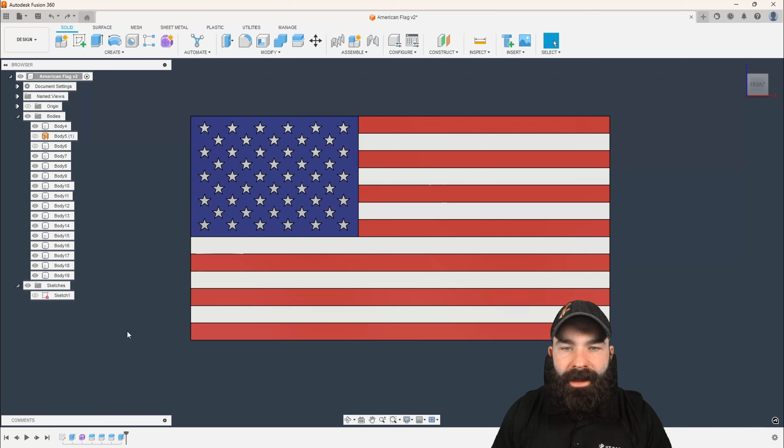As you can see, I have all of my parts already designed up, ready to go. The idea here is that we've glued this all together. It's ready. What we're really going to concentrate on now is creating the wavy shapes here, as well as cutting out our patterns for the stars.

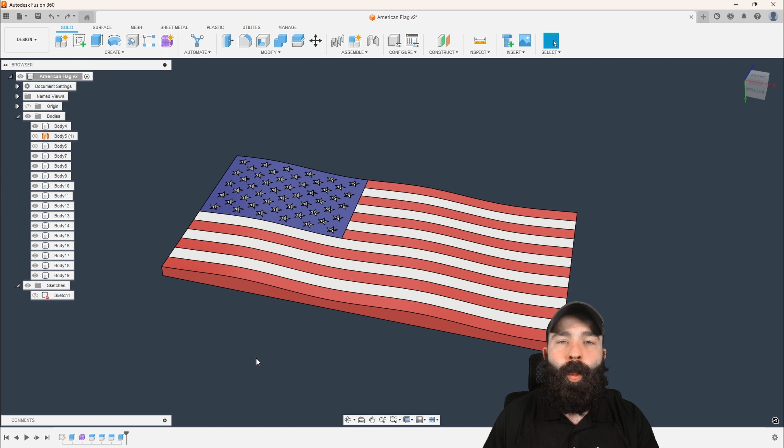So what I'm going to do is go ahead and first I need to scale this up. Keep in mind when we first drew this in my other videos, it's 1 inch by 1.9 inches. So let's scale that. We're going to go up here and say modify, scale. I'm going to window drag and highlight everything in this window. Makes it much easier to select. It will take a moment because there is a lot going on.

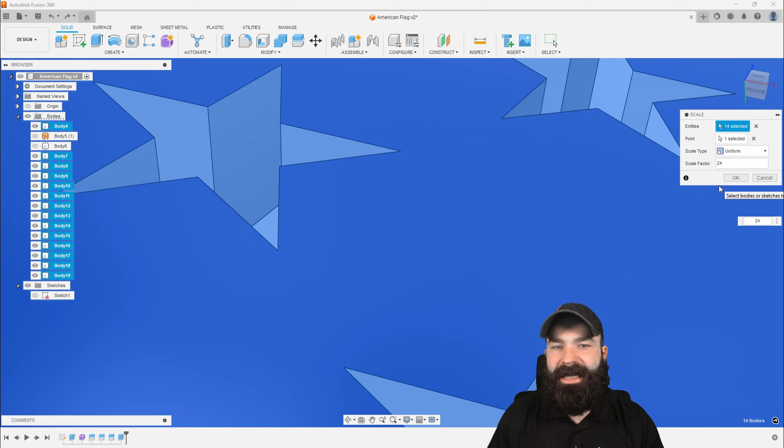Now if I want a 24-inch wide flag or tall flag, I just type in 24. It's kind of the nice thing about being able to set this and then use F6 to zoom out. So now we're about 24 by 46, or 2 foot by 4 foot. I'm pretty happy with that size.

So let's go ahead and jump over to the manufacture side of things. This is where we're going to create our actual setups and create our toolpaths to go out and run something like this.

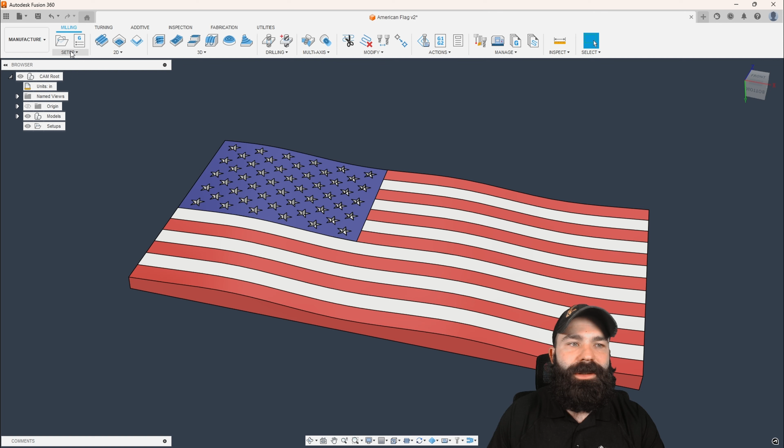What I'm going to do is actually just go to setup. I'm going to make sure I'm selected milling. Now I need to tell the software which direction my Z and my X is. I like to just use a flat face for Z, so I'm going to pick something on the bottom and then check flip Z. I'm very happy with how my X is faced, but I could also pick a face or an edge to set that X as well.

Now the location of this, I'm not so much happy with. I would rather use a bottom left corner, so I'm actually going to say my stock point is that bottom left corner. Given that we've table sawed this all, we've cut everything, we've glued it together, I'm presumably going to guess that the outside is square at this point.

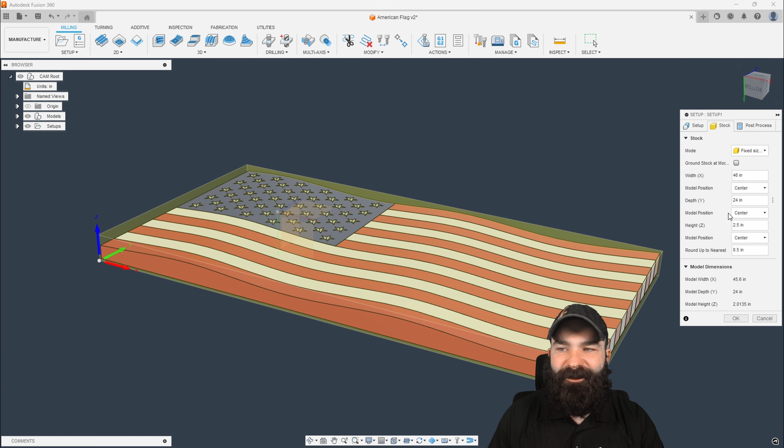So we could go ahead and jump to stock, and we're going to say fixed size box. Now if we look down on this, 46 inches is a little bit longer than our current actual material. So let's go ahead and say instead of rounding up by 0.5, let's round up by 0. Now this allows me to set a specific height in Z, as you can see here. So I'm going to set 2.25.

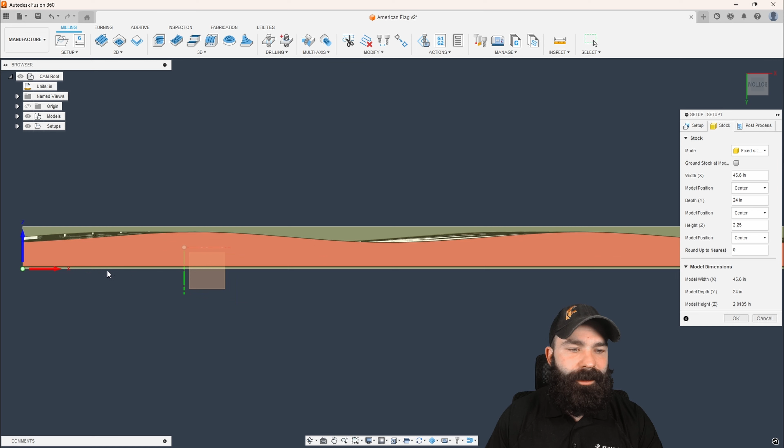However, now my part is floating. So what we may want to do is offset from bottom, and then we're going to plug in 0, which means we're going to slam that part down flat against the table. So if Z height is off the table, my XY is off the table, my part is now down and possibly held by either vacuum or double stick tape.

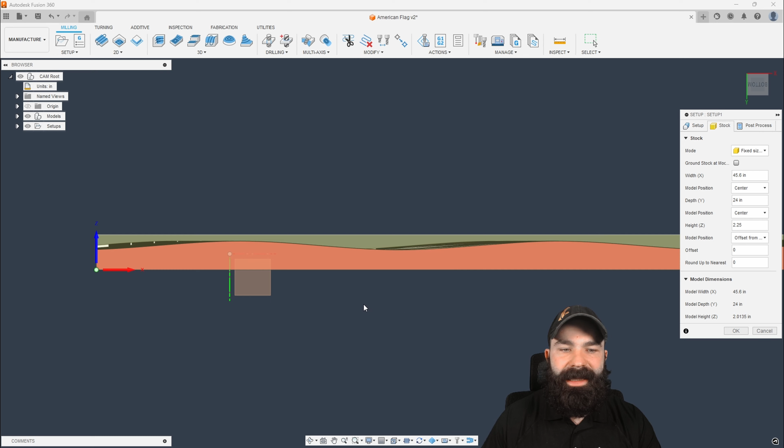And just like that, we've actually created our setup to be able to manufacture. Now, I did miss a step, and this is something I love about Fusion, is it comes in and tells you when you're actually messing something up. So I'm going to go ahead and say no. And just like that, it's actually going to go out and grab my model.

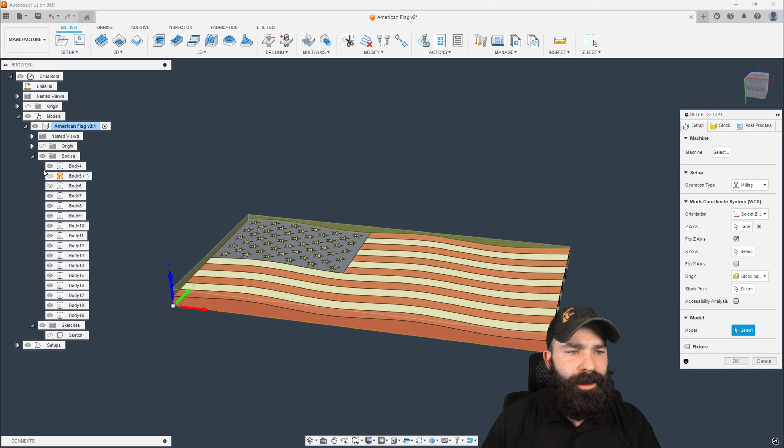In this case, I am going to actually select my model manually. The reason for that is, as you guys can see here, I actually have a couple of things turned off that I don't want to mess with from when we initially designed this. So again, I use the shift key to bulk select those couple of items. And now that they're selected, we can minimize what we have here.

So the first thing is going to be, let's machine in that kind of wavy design. There's a lot of different ways you could do this, but the easiest way would be, if I could rough out the part with a bigger cutter, I'd probably go pocket clearing in wood.

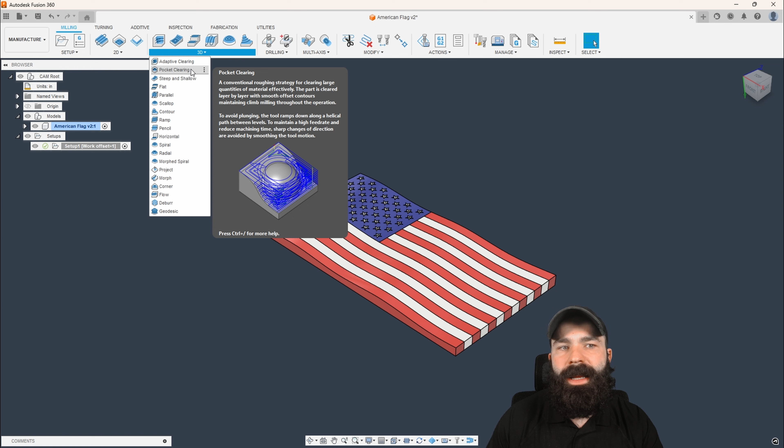However, let's say we have a little less capable CNC machine. I'm actually just going to use parallel, and I'm going to run a parallel cutter back and forth across this. So the first thing I want to do is define my tool, and I'm just going to pull something generic from the Fusion library, and we're going to go with a ball end mill. I'm going to start a little beefier here with like a 1/2 inch diameter cutter.

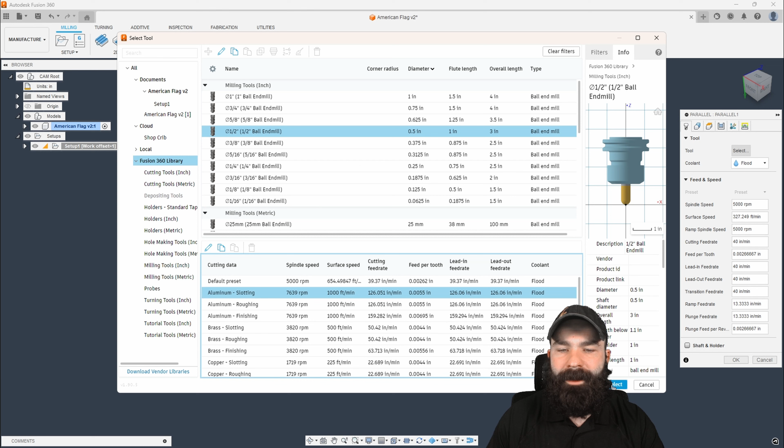Now, you are going to figure out what your speeds and feeds are on your machine. I'm going to come in here and just use aluminum roughing for a lot of what I have going on. But that being said, based on a silhouette of our part and our tool stuck on center, I'm going to go ahead and hit OK and see what we get. So what you're seeing here is we actually are getting a warning again, as you saw before when we created our setup. So we do have the ability to jump there and fix that.

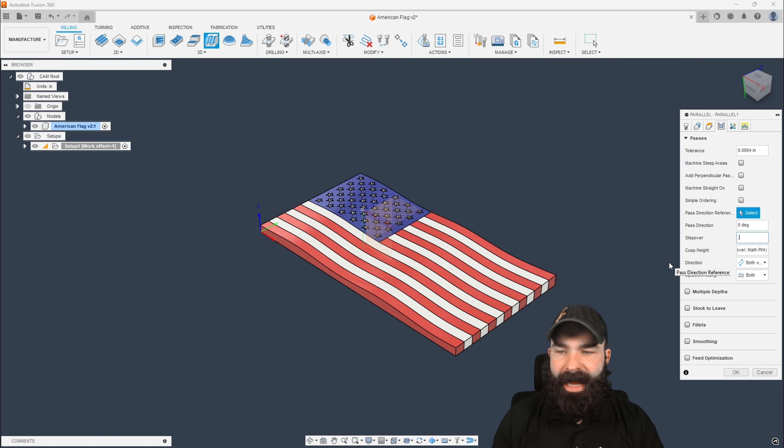So we didn't want to do a 1/2 inch ball with a 1/2 inch step over. What I wouldn't mind doing is maybe let's go like 100th step over here. So what we're now going to see is we're going to zigzag back and forth across that part, creating that wavy feature as we machine down. So again, that might be a little bit much on your machine. This is a simpler way. Again, if you have to take smaller speeds and feeds, littler bites, smaller tooling, by all means do so.

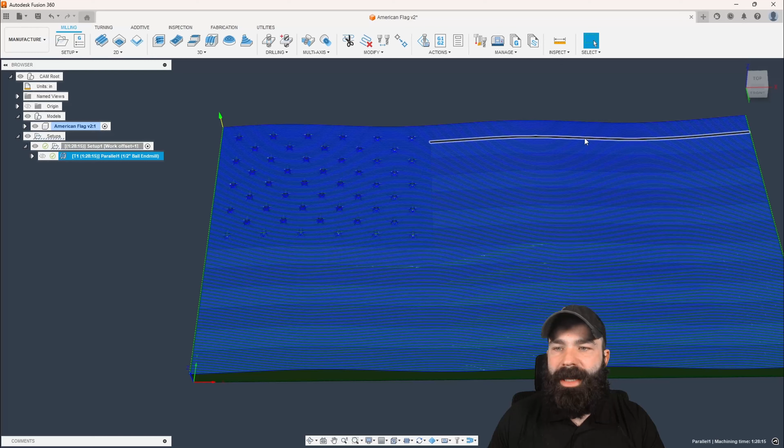But as you can see, we're now running back and forth across this part and knocking everything out of the way. The only problem that I foresee, though, is when we created these extrudes, we now have those extrudes that are kind of in the way and cause problems. Now, it's up to you whether or not you change those out, but as you can see, we're dipping down in those, and it's actually causing quite a conflict with that tool.

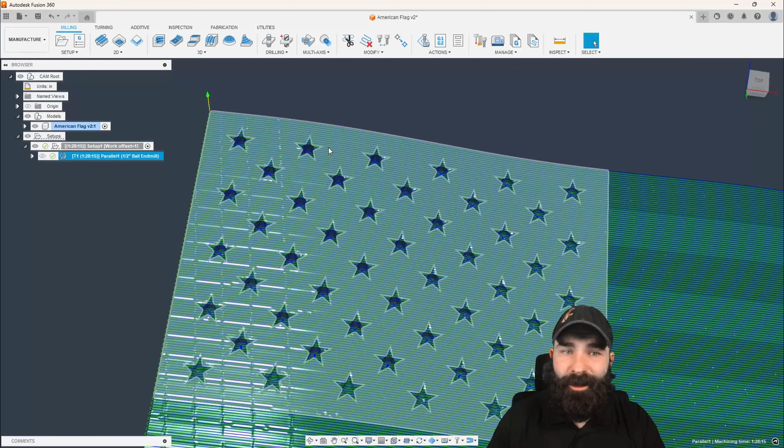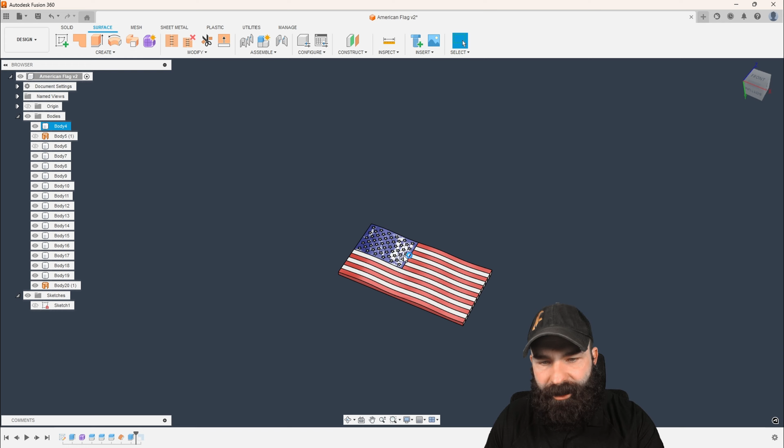So we could go back to the design side of things. Again, there's a lot of things we could do here; we could back up our design tree. One neat trick you could do here is create in the surface area. I'm going to do an offset surface, and I'm going to do it based on where all those stars sit. Now, if I pull back forward, you're going to notice we have the extrude going on, and that extrude isn't actually affecting that surface. So if I hit F6, you notice how it's over the holes, but if I turn it off, it's no longer over the holes.

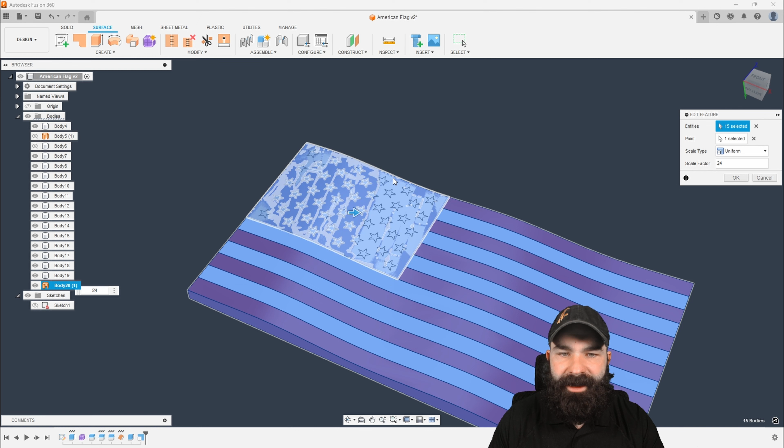But now I need to move everything forward one more time. And what I'm going to need to do is edit my scale. So I went ahead and double clicked that. And what I need to include in that scale is that surface. So I'm just going to pick it over here on the left. And as you can see, it jumped up automatically. And again, we could toggle that on, toggle that off as needed.

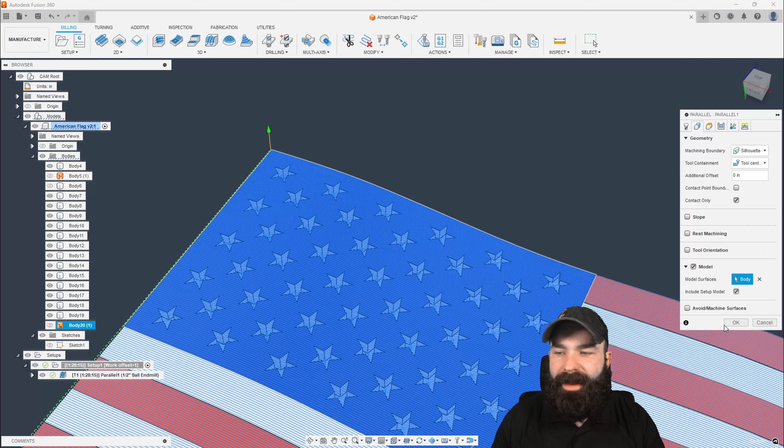So let's jump back over to the manufacture side of things, and let's go into this toolpath. So again, we're dipping in there currently, and we don't need to do anything crazy to modify those stars. What I could do is go to geometry and say model, and then in my design tree, let's go down to that surface 20 body, and then hit OK. And you're going to notice we're no longer dipping into those stars. So that was a really quick, easy way to use my timeline to fix such a simple problem.

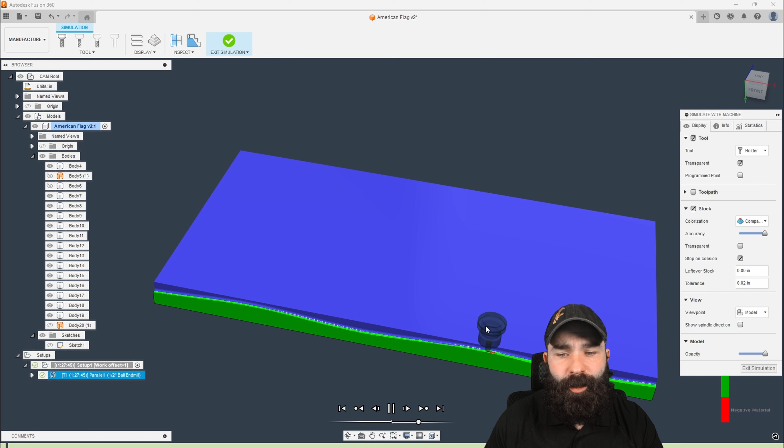And to see how this is going to run here real quick, let's go ahead and do a simulate with machine. And I'm going to hit play here. And of course, we are getting a collision at the start because we are diving in on this lower corner. But once we're inside that profile, you're going to notice we're running back and forth. Let's slow that down a little bit, but we're going up and down in Z, and we're carving out that part slowly more and more. So again, I do have my accuracy turned way up, which will cause what seems like a lot of issues and takes forever to calculate. However, it's not a big deal.

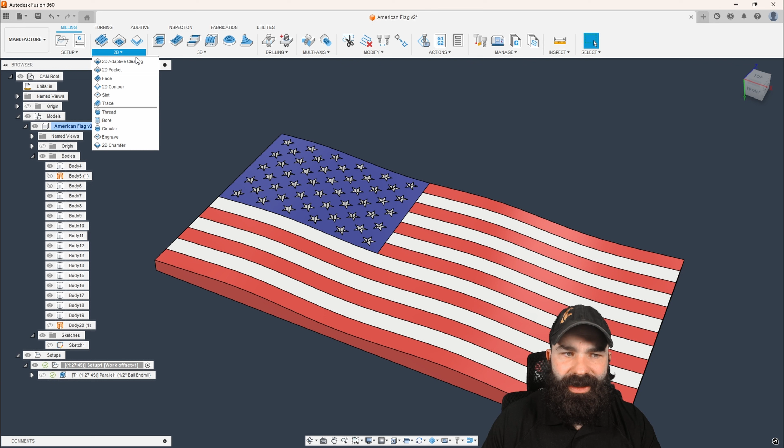Again, in the world of woodworking on something like this, I trust it. We also have in-process stock turned on to help us out. So let's go back and let's cut our stars out now. Now, there's a lot of options for the stars, and it's really going to come down to what you want to accomplish. But I'm going to go for the engrave toolpath.

I'm going to go out and I'm going to select my tool. So there's a lot of different tools in Fusion for engraving. I'm going to actually go out and just use maybe a 1/2 inch 90-degree spot drill. This is just kind of like a mitered corner tool.

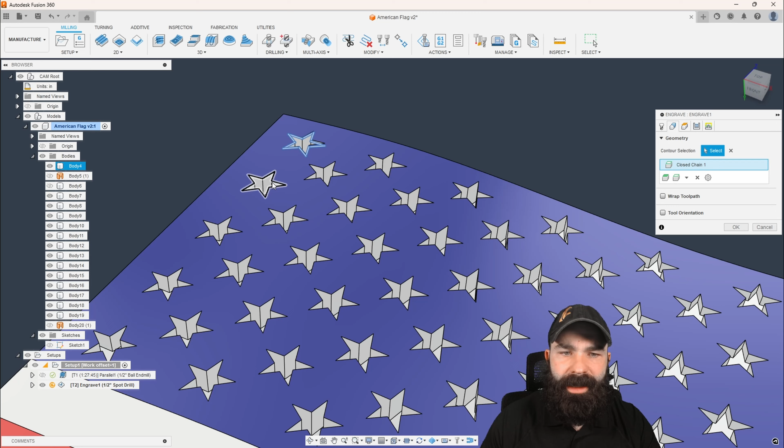I now need to go through and pick my geometry. So what I'm going to do is I'm going to go ahead and pick each one of these edges. And what this allows me to do, and I'm not going to do all of them for the sake of time, is I'm telling the software what I want to cut.

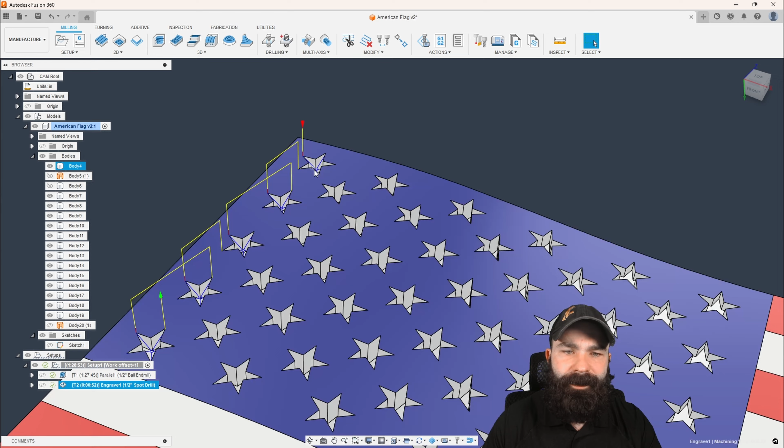Now, if I move over a little bit further to my passes tab, it's going to basically plunge down and cut these into a kind of a reverse star profile, as you're going to see. And it's going to carry that all the way down to center or to the maximum depth that it can. So as you're seeing there, it's actually cutting that kind of star shape, just not all the way to a point. So we could fix that, though, by going back into that toolpath.

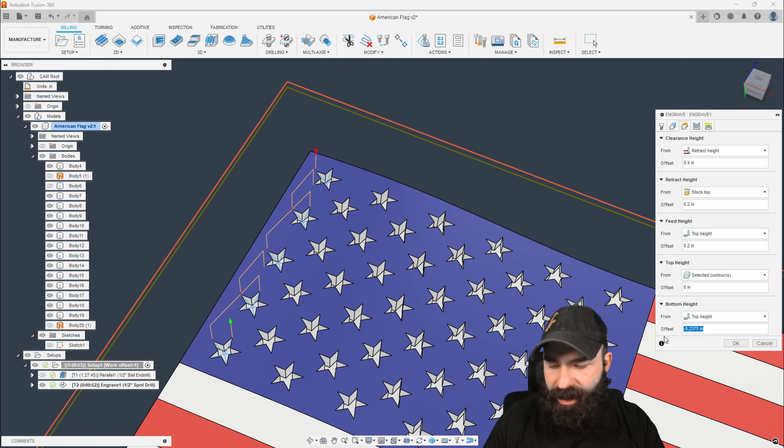And what I'm going to do is in my heights tab, I actually have a top height and then a depth. So if we actually increase our depth here, I'm going to say -0.5. You're now going to notice that that star profile always goes down to a full center kind of profile. Again, we could select all of these to achieve that for each and every one.

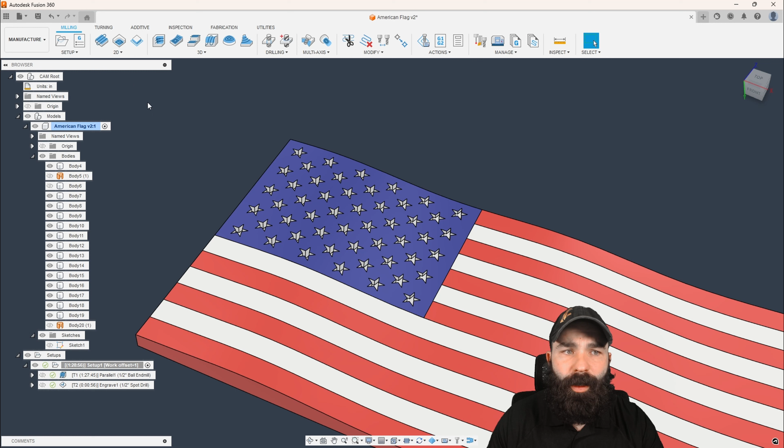Now, what we're going to do from here is we're actually going to basically cut grooves between each one of our stripes and around the outside of our entire profile. So what I'm going to do now is I'm going to go back to 2D. And I'm going to do a trace, because remember, we have this waviness in our flag. So we need to do that trace profile to follow that Z curve.

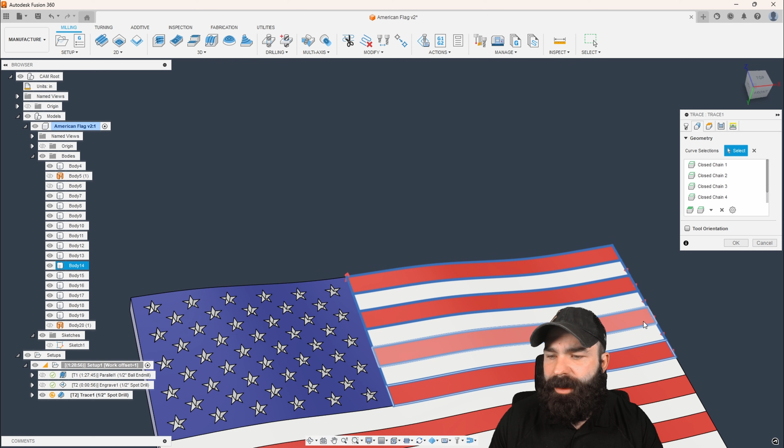So now it's up to you how you're going to pick these edges. Again, I'm just going to use the outside edge here, and I'm just going to run down and around each one. We will get a little bit of doubling up, but keep in mind, because we're constantly either climb or conventional cutting, this will actually help us to create a nice, pretty profile on both sides of those miters.

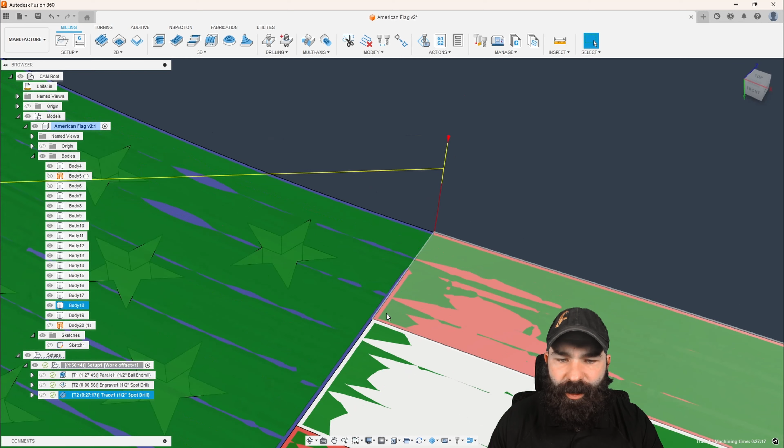So the next thing we're going to do is we're going to actually add in an axial offset. I am going to drop this tool by 50 thou, and let's go ahead and hit OK. So as you're seeing now, that tool is running around. And again, what you're seeing here is the part in the background, because we never modeled that, but we are actually tracing all of those edges around our part.

So again, as you're seeing, my stock is updating here. And if I actually take those two toolpaths and we simulate that, what we're going to get is the ability to simulate and see what the outcome is here. So again, we have that model turned off in the background. If you want it turned on, you could have it turned on. But let's go ahead and hit play.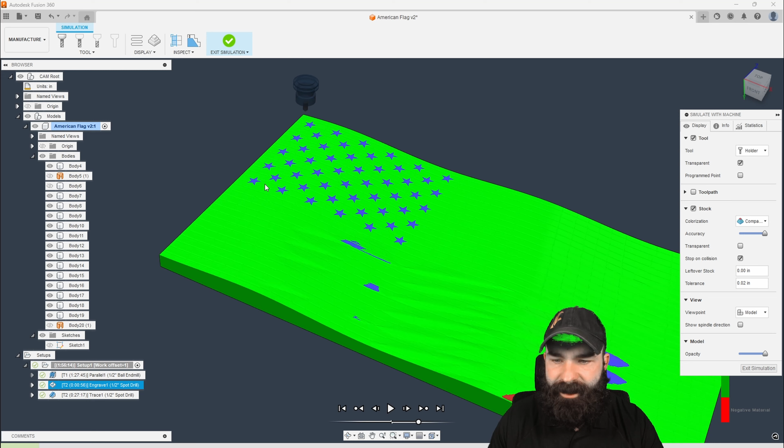And again, as you're seeing, we went in and we cut out that star profile. And we could do that time and time again based on our entire part. And then as we move over here onto the other side, again, we're now cutting our individual actual flag profile out for all of our different stripes.

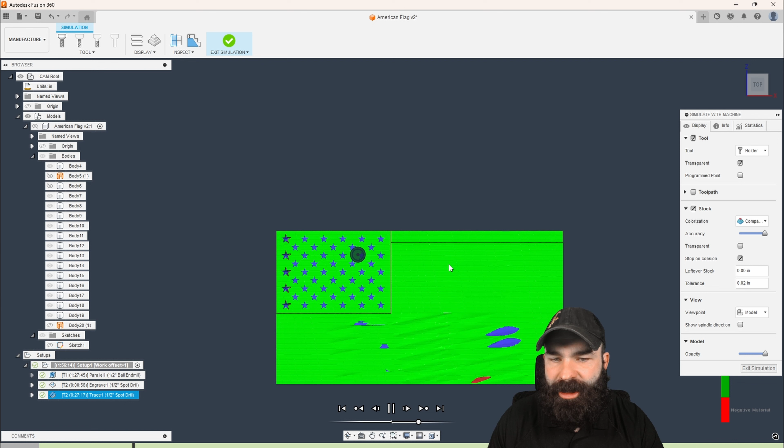Nice thing is Fusion actually is predicting where it should and shouldn't go. And again, it kind of reduces a lot of those paths from being double. Right there, we did see a double path just because it wanted to run the length of the part. But again, as this wraps up and kind of cleans everything up,